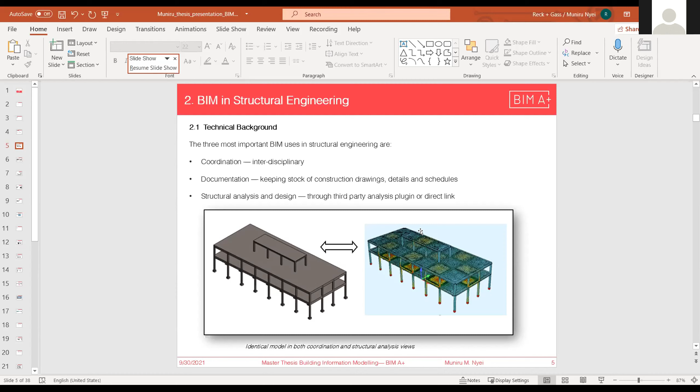And then documentation. After you go through the entire design workflow, you need to document it. Later on, we will show you how these documentations are done. And then for analysis purposes, like structural analysis and design. Later on, we will discuss these BIM uses as well.

Structural BIM model. Normally within the BIM cycle, you have the structural BIM model, and within the structural BIM model, you will also have the non-structural BIM model, such as elements that do not bear loads, but they must be included.

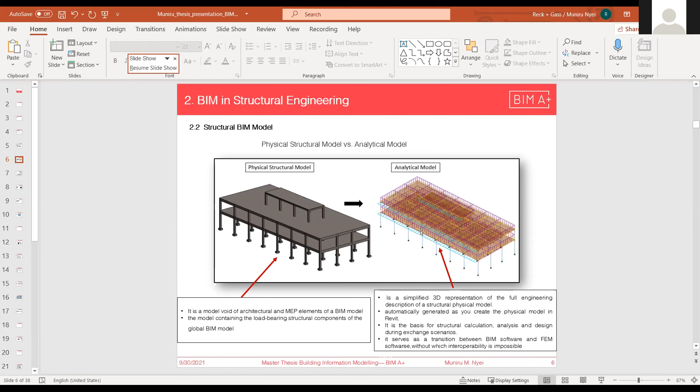But then within the structural BIM model, you have the physical structural model, and then you have the analytical model. The physical structural model focuses mainly on the load-bearing elements. And then the analytical model is the simplified version that you use to perform all of your analysis. Later on, you will see what I'm talking about.

And then in our thesis, we work on the workflow that is perceived to work within the structural domain, that is popular with most people using structural engineering workflow cycles. Initially, you have the central BIM model, as I mentioned earlier, where all of your data are populated. You have the history of the project, the name of the project, who owns the project, the families, and everything is populated here.

And then once you have this as a structural engineer, because when you are creating this in Revit, Revit automatically generates the analytical model as you are going along. When there is no analytical model of a particular element, there is a possibility to transform it to enable the analytical model in Revit. And if that doesn't happen, these things will not move to the FEM software. From the analytical model, you are then able to create an FEM analysis where you perform your structural analysis and design.

With Sofistik, how this is done: when you have the FEM analysis, then you move to design and detailing, and then documentation. So in our thesis, these are the workflows we identified and followed.

And then the benefits. Obviously, within the domain of structural engineering, productivity is very key, because these BIM workflows allow the engineers to share information as fast as possible, even though from the beginning it tends to be difficult because you have a steep learning curve. But once you are able to set your parameters right, when you have everything correct, these things work very fast. And then coordination and consistency of data is another benefit.

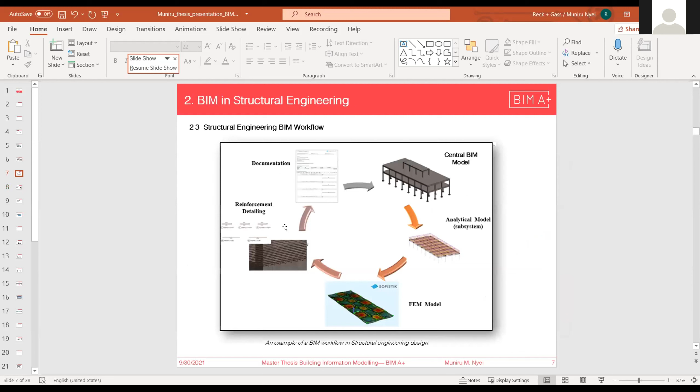Documentation. And then there's one benefit that I will refer to as the rise of downstream innovations and technology. As a result of BIM, there are a lot of downstream innovations. Like you see, Dynamo is coming, or we have Karamba, Rhino, and all of these things that are coming because of the existence of BIM, of course.

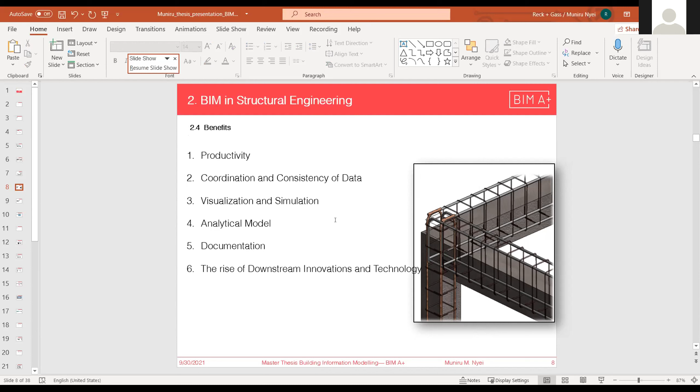In the midst of these benefits, there are also some challenges, such as time and resources. To adopt BIM in structural engineering, it requires some time and it needs some resources. But that does not outweigh the benefits. These are just challenges. They are not difficulties, but they are challenges. And then structural engineering is also a challenging field. You need to have specialist skills, otherwise the modeling process will be a futile effort.

And then the model requires frequent updating and authoring. Interdisciplinary knowledge is required. Coordination bottlenecks. Sometimes even in my office here, we have similar problems where we have to coordinate with the architect. There are always some problems. We have to change and come back. However, these do not outweigh the benefits. They are just some challenges.

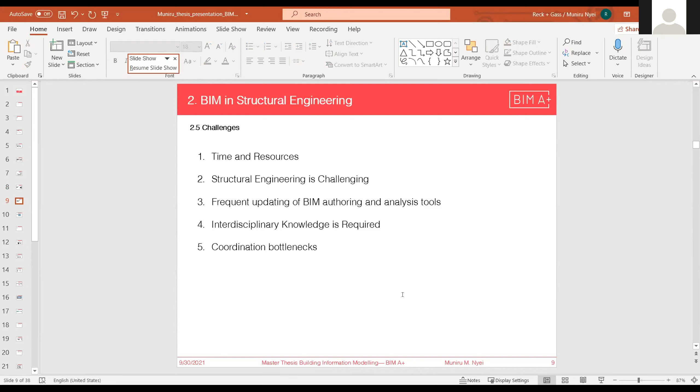We look at interoperability. The definition in ISO is the ability of two or more systems or components to exchange information and to use the information exchanged. This is very important. It is not just about exchanging the information, but you must have the ability to use and reuse the information exchanged. And this interoperability is what we are interested in, how this data moves, how we exchange data from one file to another without creating parallel files.

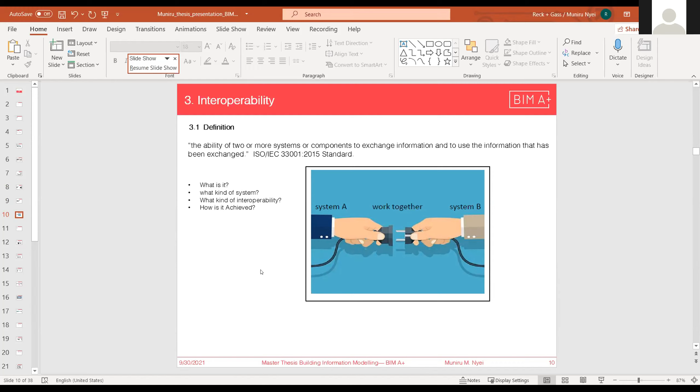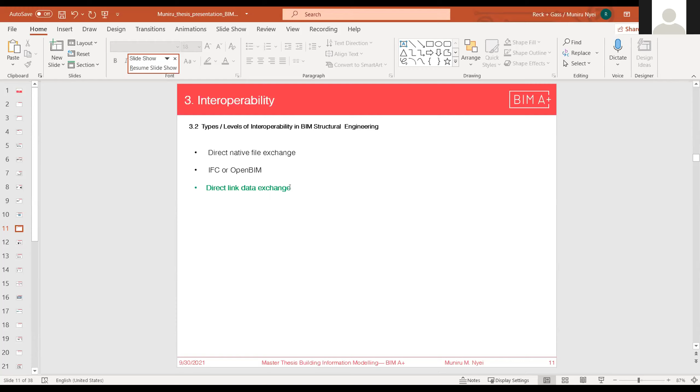For BIM to work in structural engineering, we identified 3 levels of interoperability. We have the direct native file exchange, the IFC or Open BIM format, and we have the direct link data exchange. As I indicated here in green, my focus is on this direct link. That's why I put a green mark.

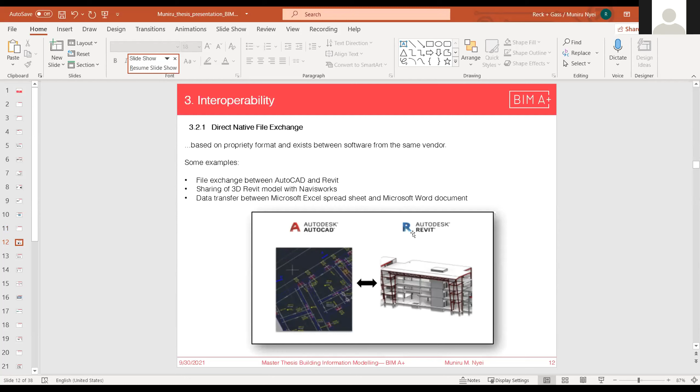This is an example of direct native file exchange. In Revit, you link an AutoCAD model with that of Revit, because they are of the same company. This is native file exchange. That's one way you can exchange. When you exchange Microsoft Excel documents with Word documents, you are talking about direct native file exchange. IFC, as you see in this model, is something I did during the course period. I exchanged a Revit model with ArchiCAD.

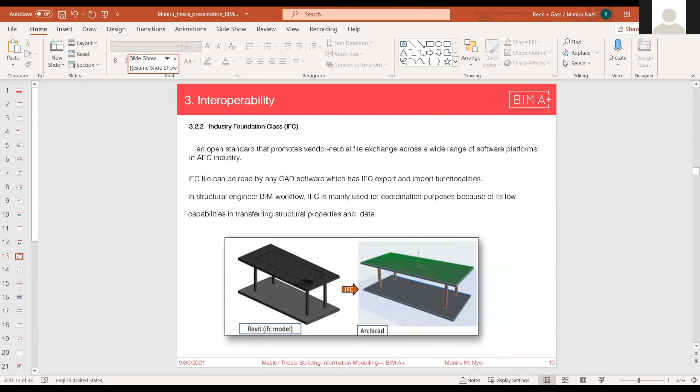That's one way. And then we have direct link, or bi-directional, or round-trip engineering. This is where you centralize a model; you use Revit as a central database. Once you have this central database, you are able to exchange this information to all of these software, and then you come back. As we say, round trip, you are able to come back. You leave and then you come back without having a parallel file. All of the files are centrally located. And this is the focus of our thesis.

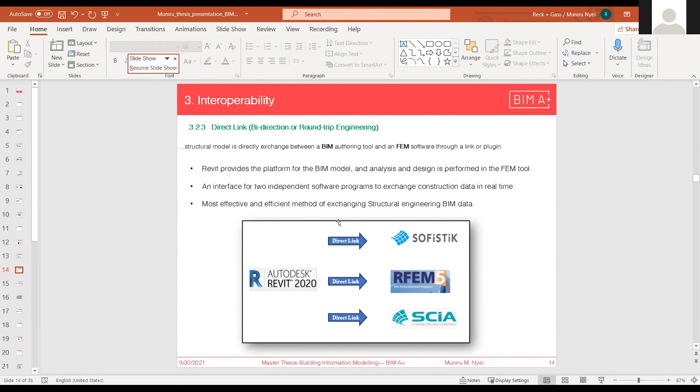2 case studies. The 2 case studies are based on direct link interoperability. In case study number 1, we have A and B.

In case study A, our focus is how does the model structural data exchange with these three softwares? Do they receive the proper data? And then the next case study is when they receive this data, are the calculations consistent? Do we have a proper calculation?

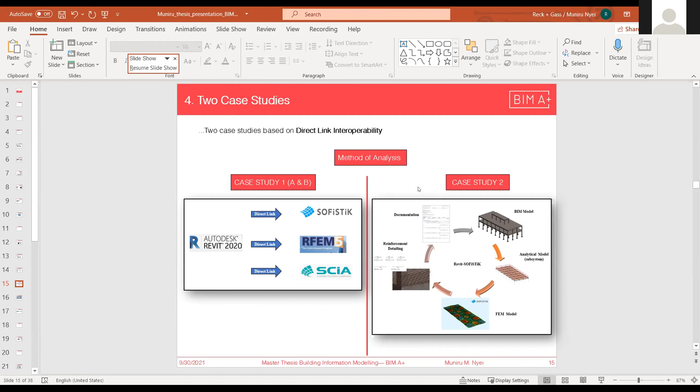And then case study number 2, we just try to look at what the whole structural engineering workflow looks like. And then we will be seeing these short case studies. So we got this data from Politecnico. This is one of their projects they did some years ago in Bologna, Italy.

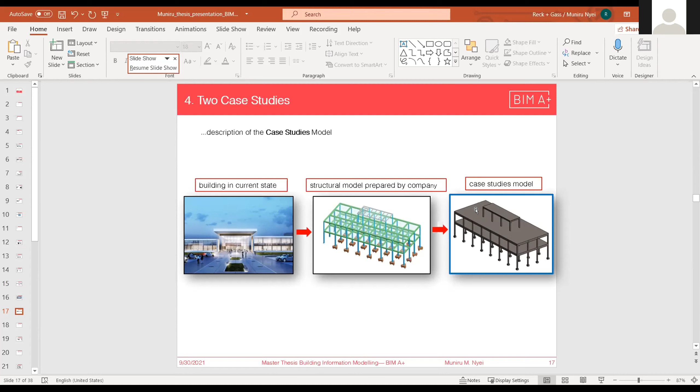When they provided us this information, they also provided me the structural model prepared by the company. I took their structural model and created my own structural model in Revit, as you see here, the last one. Once I had that, I went on to follow the design process using just basic linear static analysis without any seismic analysis, nonlinear analysis or pushover analysis, just something basic to see how the information goes.

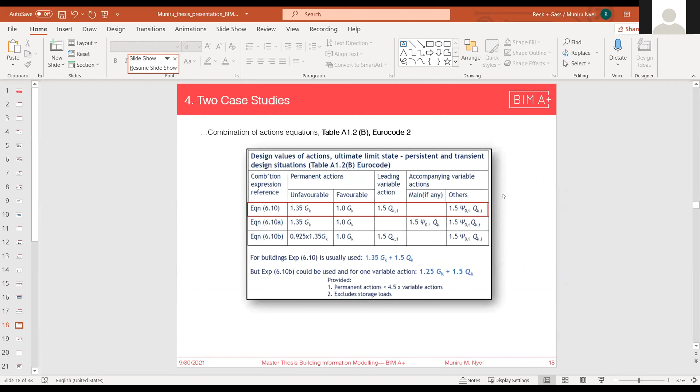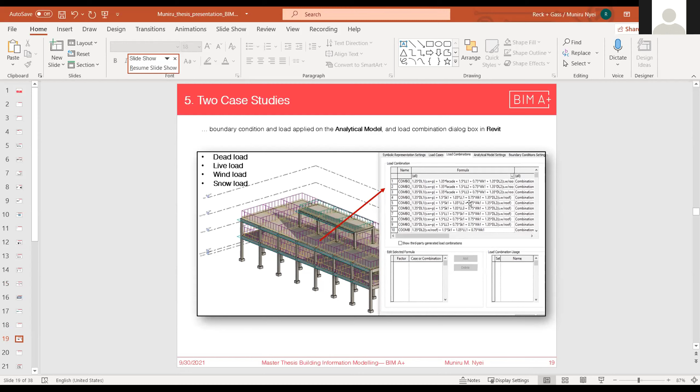But then I specifically focused on the Eurocode using this particular reference. With this reference from the Eurocode, we considered the load combinations we created from the analytical model, and these loads on the model: dead load, live load, wind load, and snow load. All of this information, as you see here, was populated in Revit, and we combined them using the combination factors.

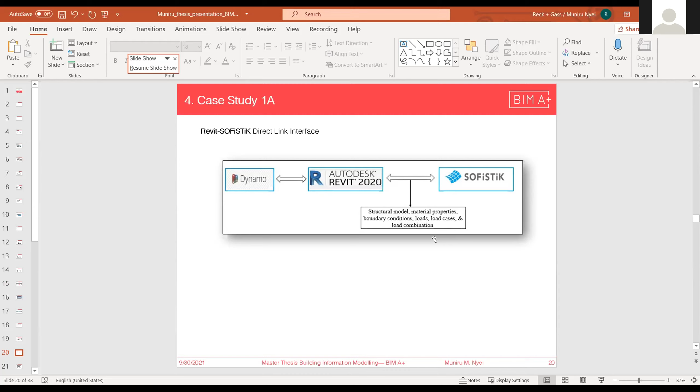Later on, we moved to Sofistik, Revit Sofistik. We made some of the geometry in Dynamo, then we populated the data in Revit, and then we went to Sofistik. We wanted to make sure that the structural models, the material properties, the boundary conditions, the load cases, and load combinations were all transferred properly. These were our interests. And as you know, Sofistik has a menu bar directly linked to Revit, and we have it here.

Sorry, Muniru, you are almost reaching the end of the time. So if you can... Okay, I conclude.

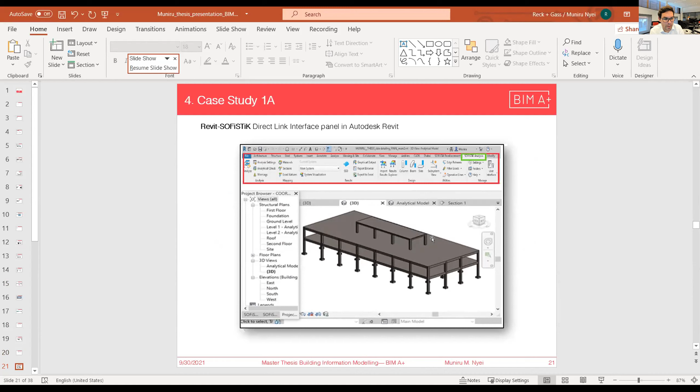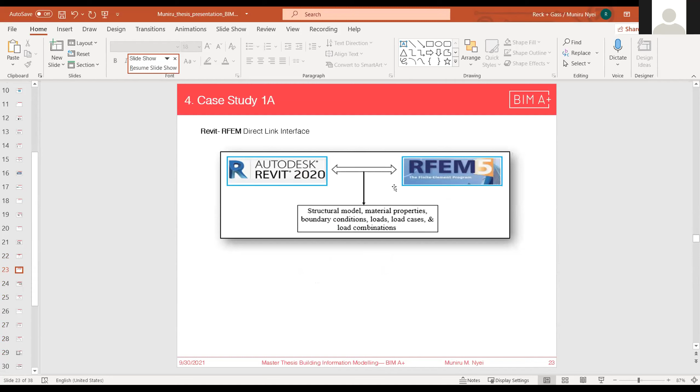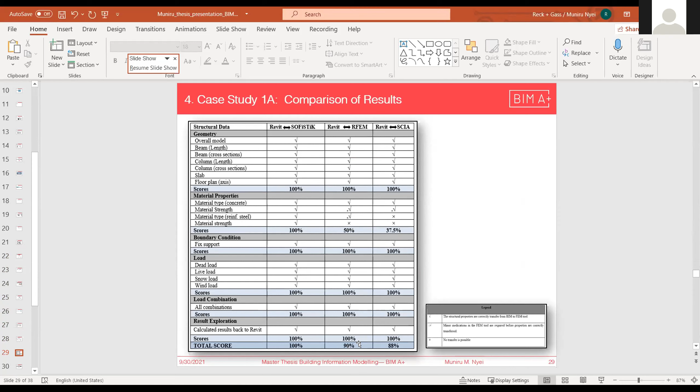To the conclusion. From here, we just followed this cycle and got the results for Revit and Sofistik, then Revit and RFEM, and the same way Revit and SCIA Engineer. The conclusion was that Revit and Sofistik gave us 100% data exchange. With RFEM we got about 85 to 90%, and SCIA gave us 88%.

In case study number 1, we looked at the internal forces calculations, and we realized that when you exchange the data with Revit, we got exactly the same internal forces. Sofistik, RFEM, and SCIA Engineer gave almost the same; there was no big difference. So we were able to understand that when you use this process, you're going to get the same result. This is one of the interesting outcomes of the thesis.

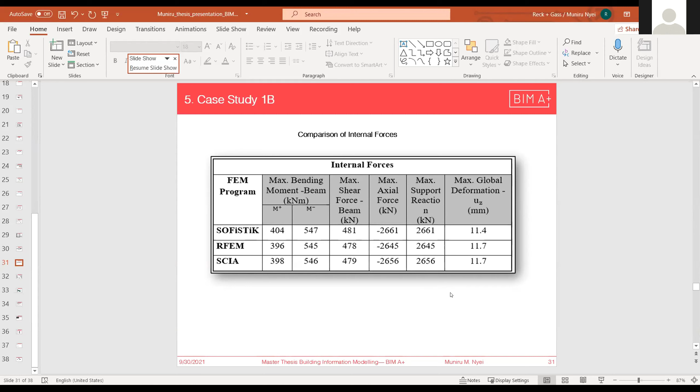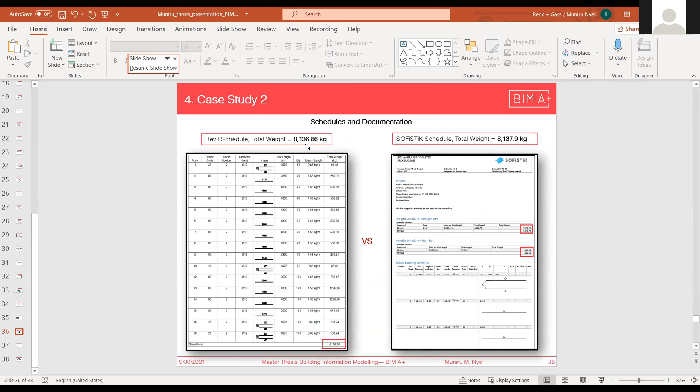Then case study number 2, with a workflow like this, we got the reinforcement detailing. We designed the slab and got the reinforcement quantities, the same value we obtained from the Revit schedule. Sofistik has a way of producing the same result, and we came close to the same quantity of reinforcement needed from Revit and Sofistik.

So to conclude, some main BIM uses in structural engineering were identified as interoperability, interdisciplinary coordination, analysis and design, and documentation. For interoperability, we have three main levels available, as mentioned earlier, and the direct link was validated as the most effective way of exchanging load-bearing structural data: Sofistik has 100% data transfer, RFEM 90%, SCIA Engineer 88%. The technical capability of the Revit Sofistik workflow was proven, and we also showed that BIM in structural engineering has tremendous potential, even though there are some challenges.

We recommend that a BIM structural engineer must have the knowledge to perform this workflow. Our study also contributes to international knowledge and the current discourse in BIM, and offers significant insight for structural engineering companies wishing to integrate BIM into their workflow. So far, this is what we have from our end.